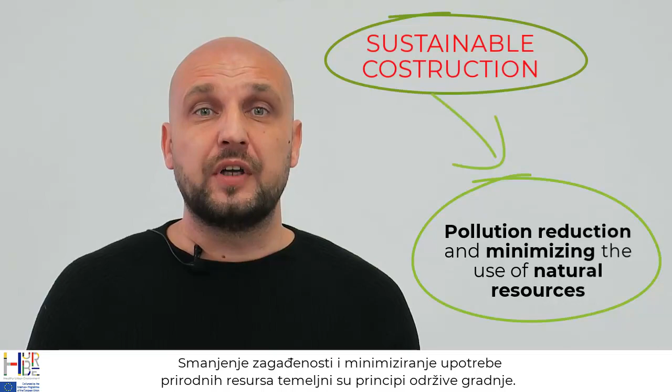I'd like to present the possibilities of using industrial waste in sustainable civil engineering. Pollution reduction and minimizing the use of natural resources are the fundamental principles of sustainable construction.

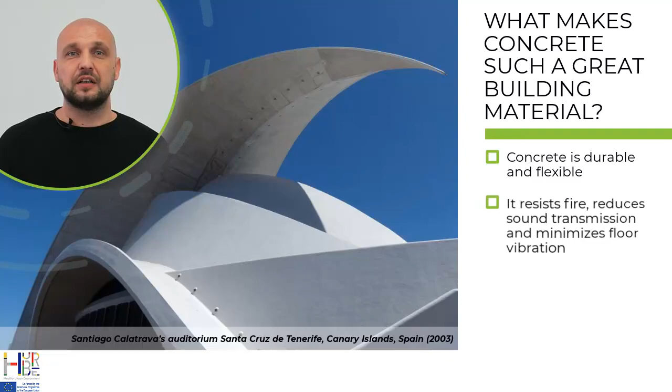Although a new wave of sustainable building materials have emerged recently, concrete will remain in use as a favorite construction material well into the future. But what makes concrete such a great building material? Concrete is durable and flexible. It resists fire, reduces sound transmission and minimizes floor vibration. It is readily available and affordable. And above all, it offers an architect a great deal of freedom in generating complex forms and eye-catching results. For these reasons, concrete plays a part in nearly every significant structure built in the world today.

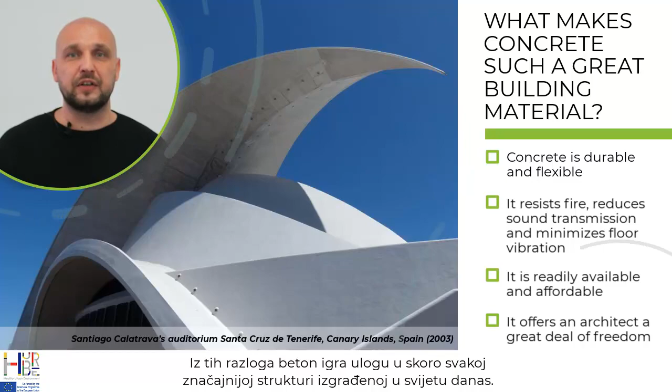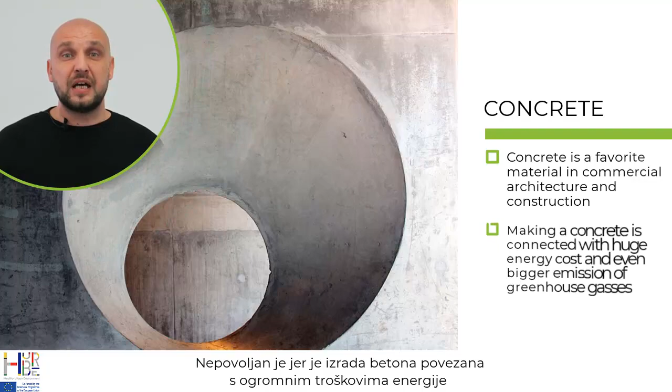However, the environmental impact of concrete is rather complex. It is bad because making concrete is connected with huge energy cost and even bigger emission of greenhouse gases.

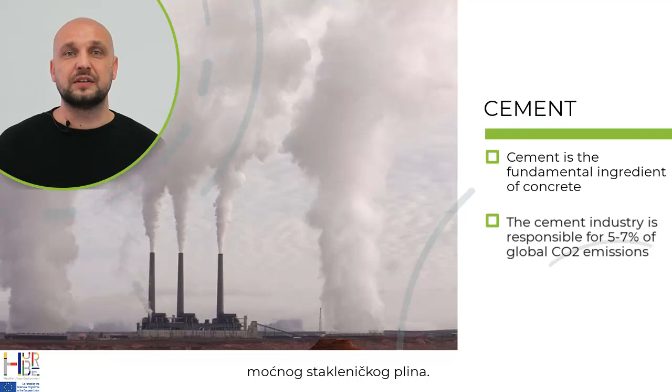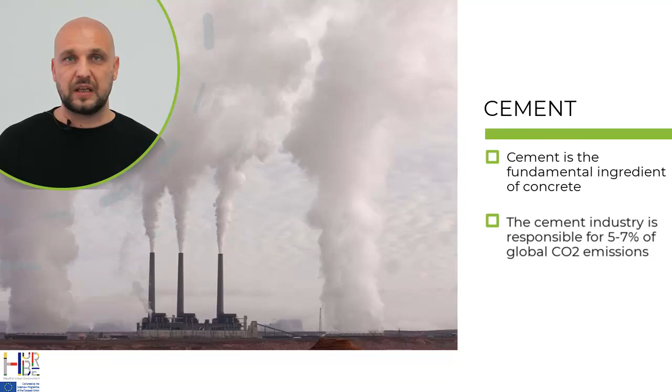Cement is, of course, the key ingredient of concrete. The cement industry is one of the main producers of carbon dioxide, a very potent greenhouse gas. The CO2 emission from concrete production is directly proportional to the cement content used in the concrete mix. It is estimated that every ton of Portland cement produced releases nearly a ton of CO2 into the atmosphere.

To illustrate the scale of this phenomenon, all the forests in the world are not enough to offset even half the environmental impact of global cement and concrete production.

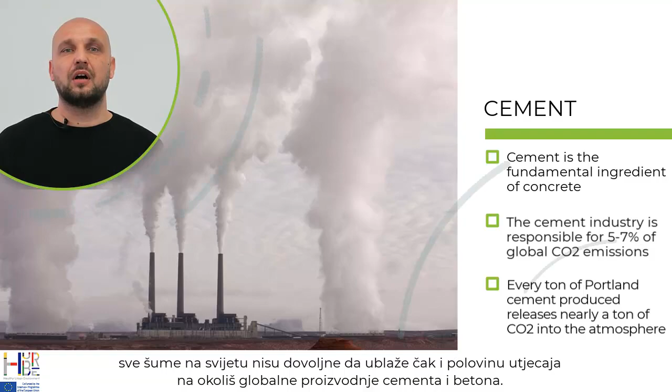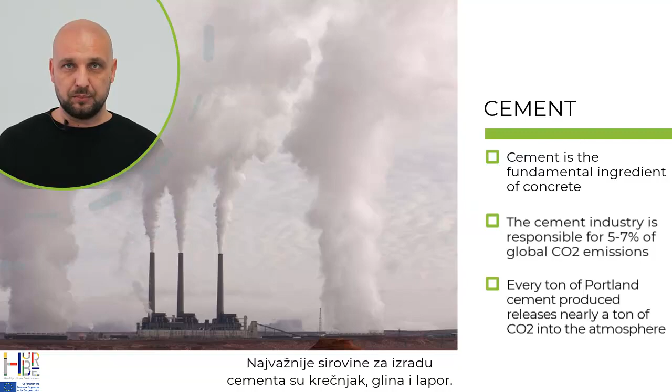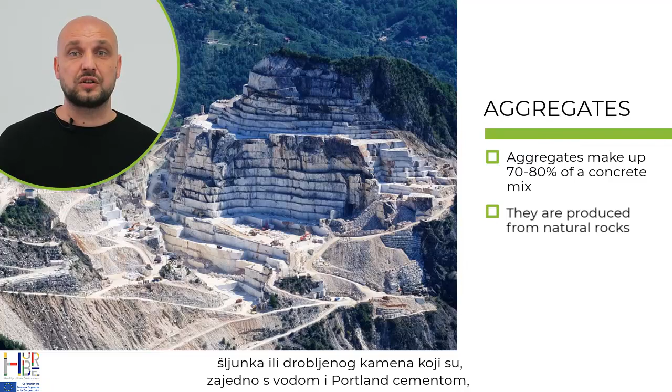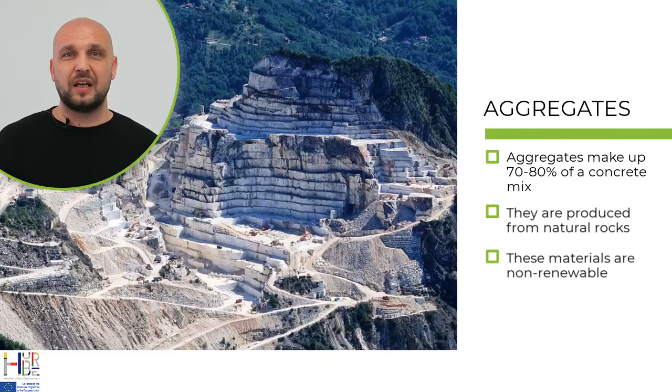The most important raw materials for making cement are limestone, clay, and marl. Aggregate, which makes up 70 to 80% of concrete mix, is produced from natural rocks. Aggregates are inert, granular materials, such as sand, gravel, or crushed stone that, along with water and Portland cement, are an essential ingredient in concrete. These materials are non-renewable. They are extracted from quarries by blasting or by ripping using heavy machinery.

On the other hand, in many cities, industrial waste is an obvious and visible problem. Landfills are located in close vicinity to the cities or even in suburban areas. Thermal power plants and metallurgical facilities generate huge amounts of industrial waste. Large landfills occupy fields near many cities. Industrial waste sinks harmful chemicals into groundwater and pollutes soils.

Paradoxically, industrial waste can make concrete and other construction materials more sustainable, and right now you will learn how it is possible.

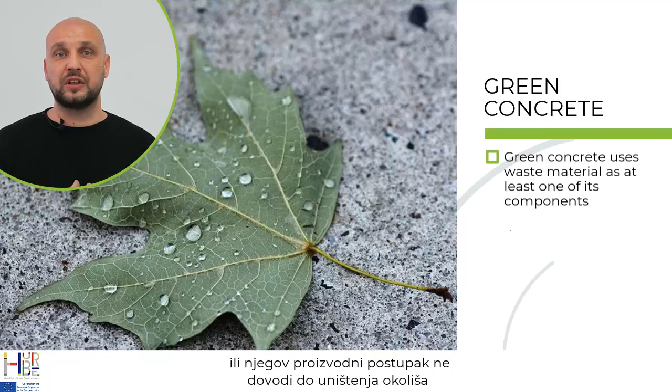First, let's learn about green concrete. Green concrete is a concrete which uses waste material as at least one of its components, or its production process does not lead to environmental destruction, or it has high performance and life cycle sustainability.

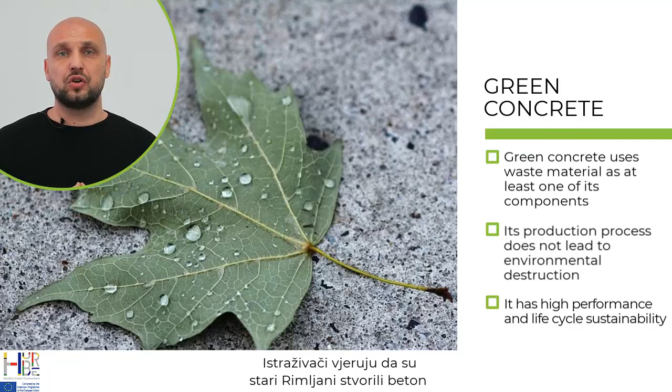Concept of green concrete is not a new one. Researchers now believe that the ancient Romans created concrete that is far more environmentally friendly and durable than modern concrete. Romans used volcanic ash to produce concrete, and now we use industrial waste or byproducts.

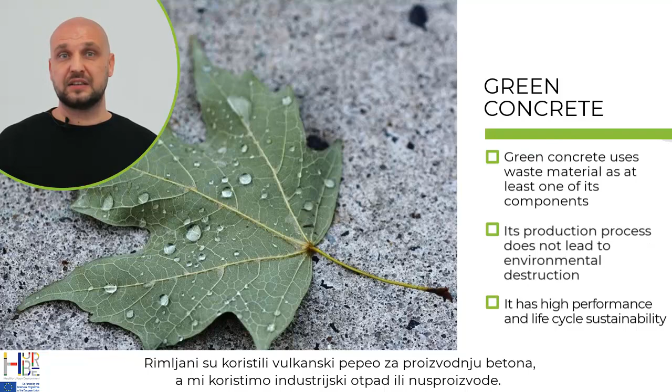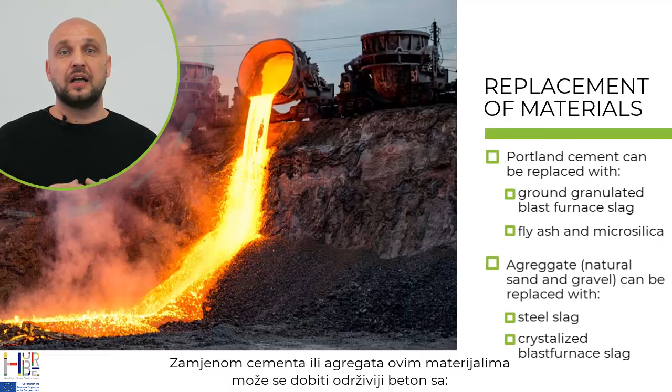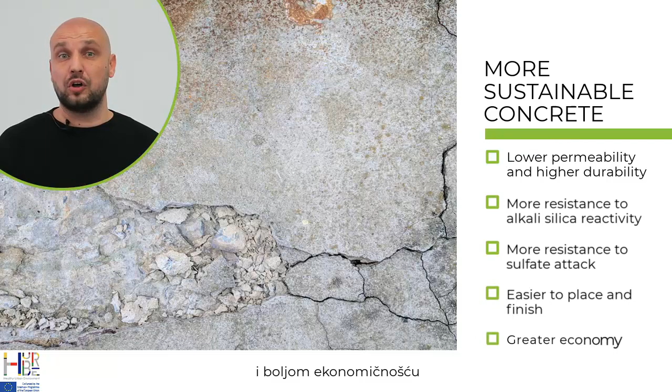By replacing cement or aggregate with these materials, a more sustainable concrete can be obtained with lower permeability and higher durability, better resistance to alkali silica reactivity, better resistance to sulfate attack, easier placing and finishing, and of course, better economy, because industrial waste costs less than Portland cement or natural aggregate.

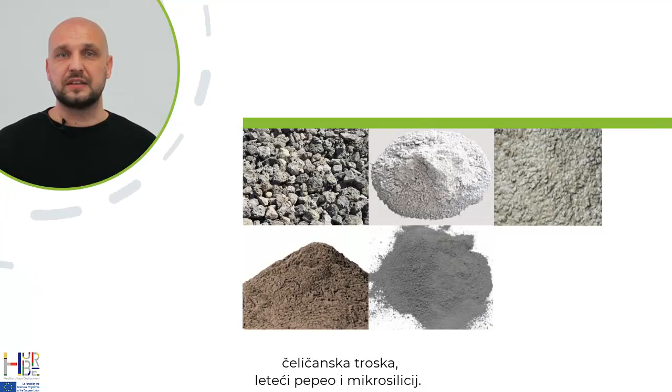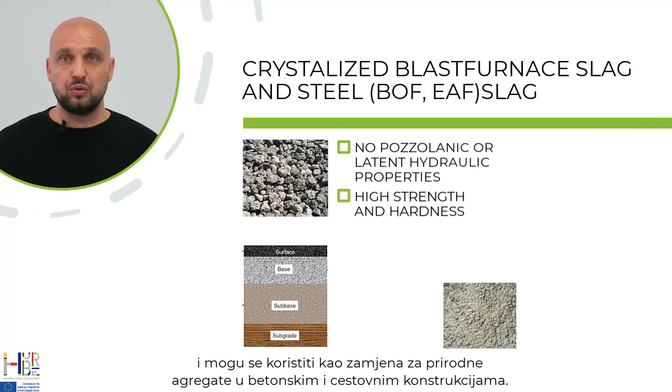The main byproducts of metallurgical processes and thermal power plants are air-cooled and granulated blast furnace slag, steel slag, fly ash, and microsilica. Crystalline blast furnace slag and steel slag are almost inert. They usually have good physical-mechanical properties and can be used as a substitute for natural aggregate in concrete and road constructions.

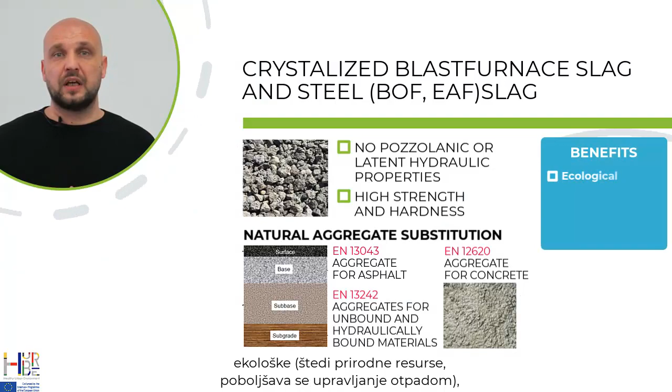Benefits of aggregate supplements use are ecological - it saves natural resources and improves waste management. Then economic - lower price compared to natural aggregates, and mechanical properties of final products could be significantly improved.

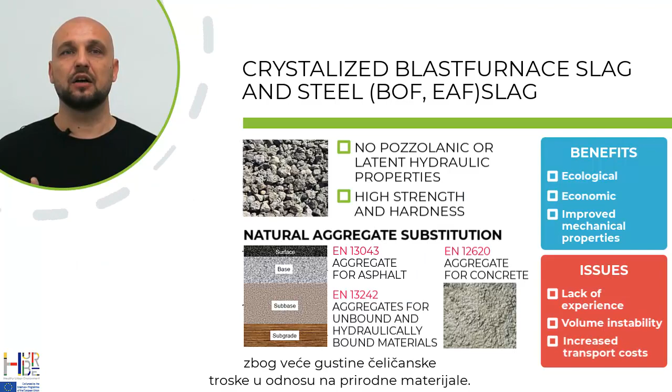There are, however, some issues, such as lack of experience in slag use by local construction companies, volume instability, which can be eliminated by appropriate weathering procedure, and increased transport costs due to higher density of steel slag compared to natural materials. Fly ash, microsilica, and ground granulated blast furnace slag are used as a cement substitute.

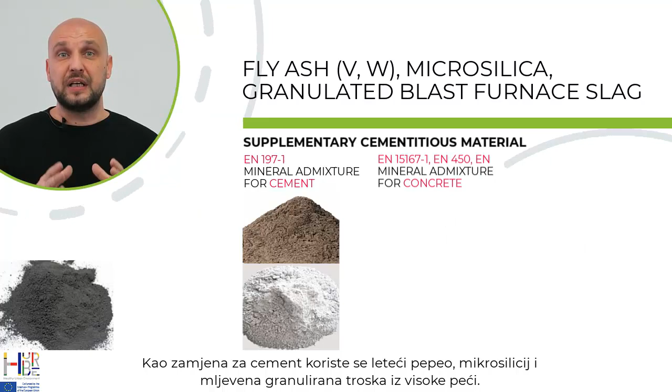Fly ash is the residue of burning coal in thermal power plants. It is a so-called pozzolanic material, which means that it does not have any binding properties, but it has the ability to contribute to the strength of concrete through reaction with lime released by cement hydration.

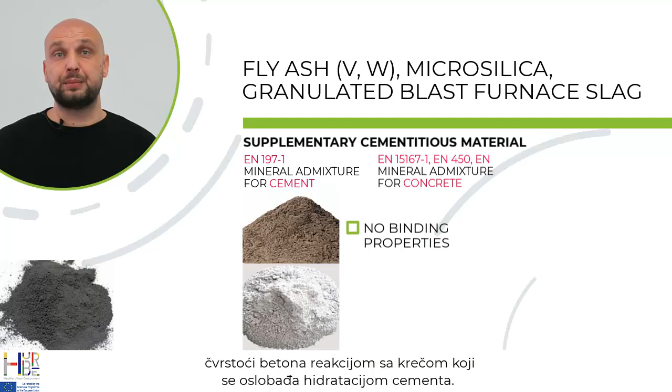Microsilica is a byproduct in arc furnaces for the production of elemental silicon or ferrosilicon alloys. It has great pozzolanic activity and is used as mineral admixture for cement and concrete. Ground granulated blast furnace slag has latent hydraulic properties, which means that it can react only after proper activation.

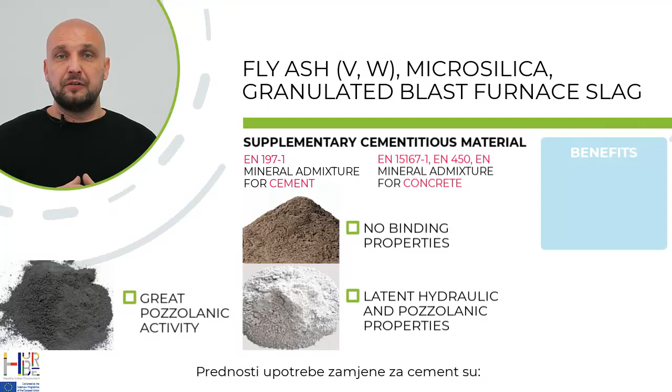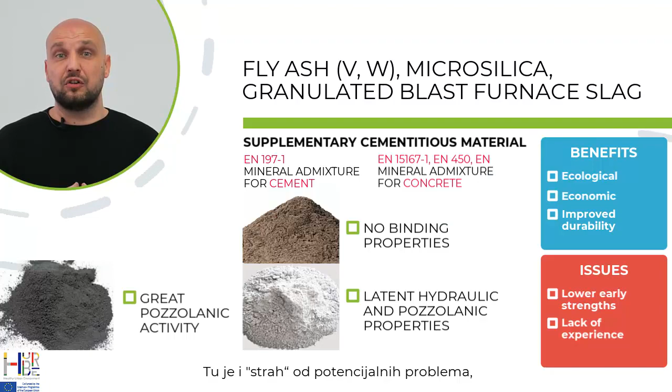Benefits of cement supplement use are ecological, economic, and durability of concrete structure is improved. Issues are lower early strength of concrete, lack of experience in mineral concrete admixture use by construction companies, and there is also a fear of potential problems, such as delayed volume expansion, for example.

These are the obstacles for wider use of alternative raw materials in the construction industry. So, it is of great importance to encourage construction companies by providing more proofs on their safe and economic use.

Currently, there are only few regulatory measures to promote the use of secondary raw materials in the construction industry, so only lower production costs and guaranteed safe use can motivate construction companies to start using these byproducts.

Nevertheless, balancing the need for economic growth with sustainability remains one of the most pressing challenges facing the modern construction world. Today, innovators are looking to improve the environmental credentials of concrete. A number of additional recycled pozzolans are currently being tested, and we'll see what improvements these materials will yield.